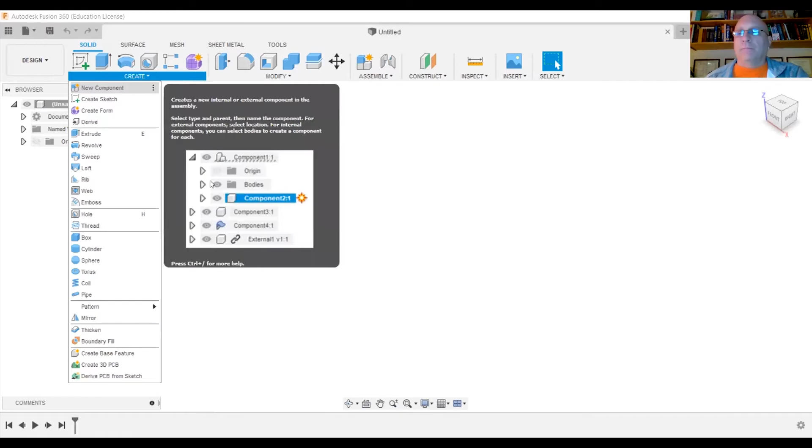I'm going to go up to my Create, and I'm going to select a new component. And we'll select OK. I'm going to come up, and I'm going to create a sketch. I'm going to use my front sketch there. I'm going to make a simple rectangle. I'm going to start at my origin, and I'm going to make my rectangle 6 by 2.

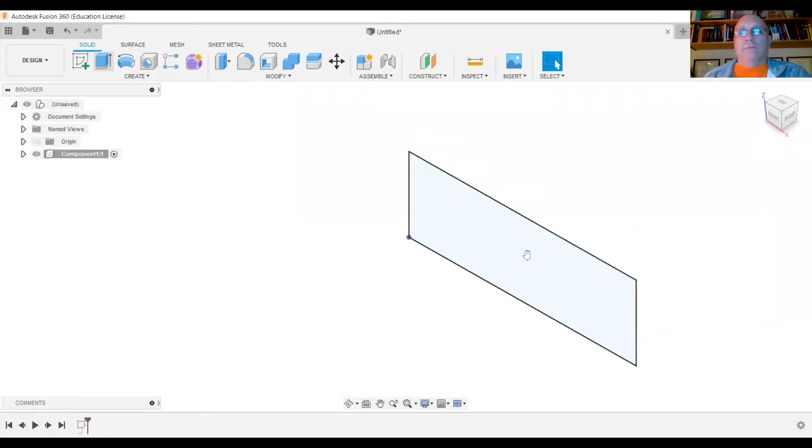I'm going to finish my sketch, and I'm going to extrude my rectangle back 1 inch. And we'll slide it over here so you can see a little bit. I'm going to zoom in. Now, we're going to actually put some holes in, but I don't need to make any more sketches. I'm going to do everything in 3D.

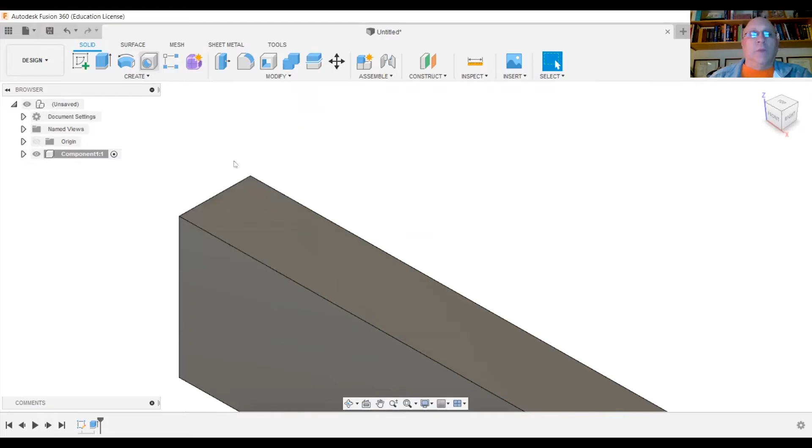So I'm going to go right up here, this little icon called hole. I'm going to select the face that I want to put my hole in. Next, I have to select the edges where I want my hole reference to. So I'm going to select my far edge. We'll make that 0.5. I'm not hitting enter. I'm just typing in the number. And I'll select my front edge, and I'll call that 0.5.

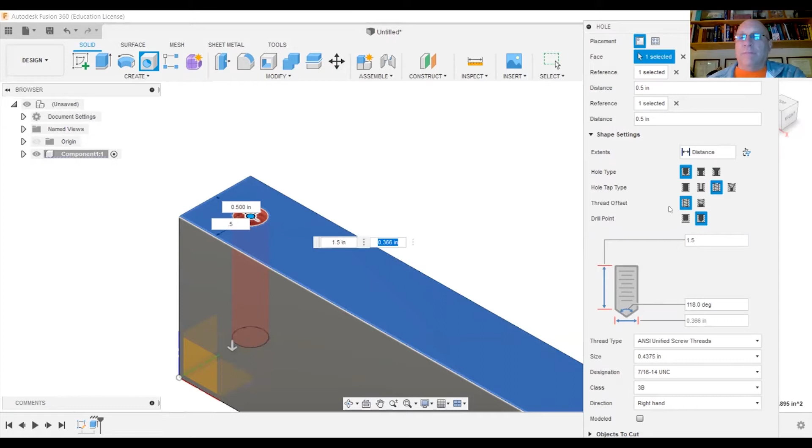Next, I'm going to come over here and look at my hole dialog box. So right now I have just a simple hole. This hole, I want to make threads in there. I want to tap it. So I'm going to select tapped. For the depth of this hole, we are going to make this not all the way through. So I'm going to make this about 1.5 deep. I'm going to close this up so you can kind of see this bottom window.

Now, the size of my hole, I want this to be a 1/2 inch. And its designation, it's going to be 12 dash or 1/2. My designation is going to be 1/2-12 UNS. I'm going to make it 1/2-13 UNC. My class, I'm going to make it a 2B. I'm going to select OK.

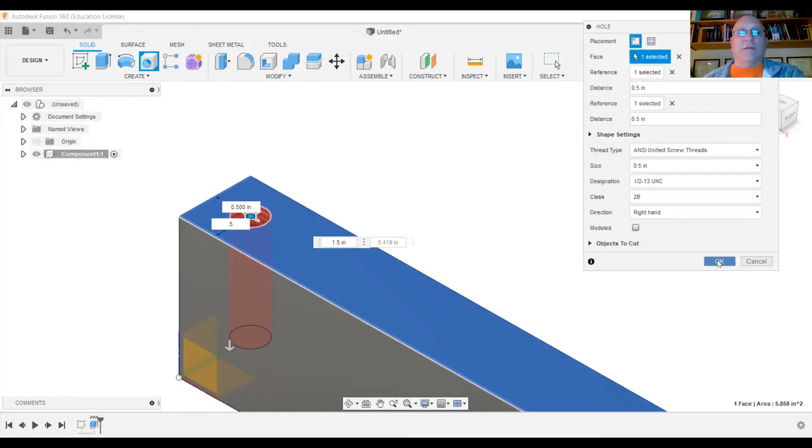Now, when I zoom in, you can kind of see that it looks like there's threads in here, but all that is just an image that's been pasted in there. What I want to do is I want the real threads. So I'm going to go back down on my history bar down here. I'm going to right click, edit the feature. This time, before I hit OK, I'm going to select modeled. And then I'll select OK.

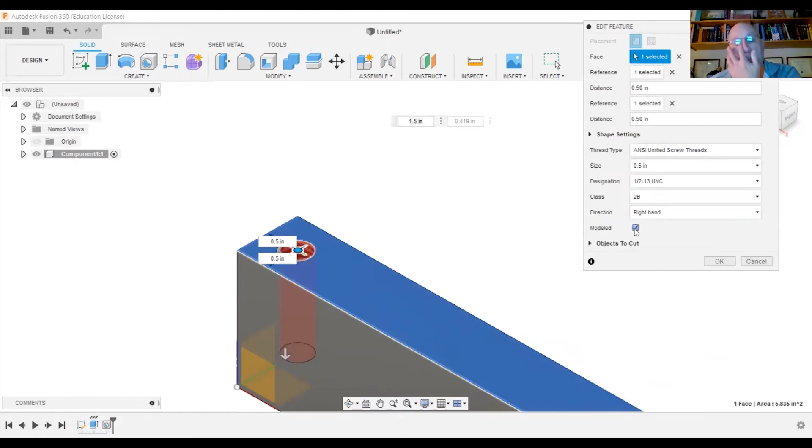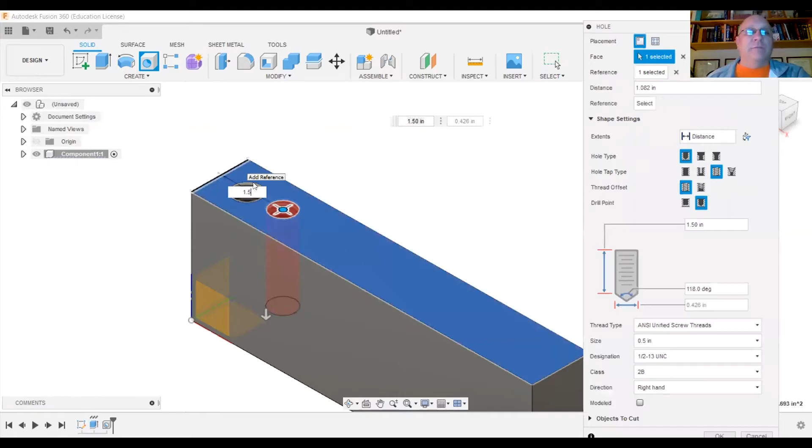Now, if I come over here, you're going to actually see that there's threads actually technically cut right inside of this piece. And that's what I want to see. I'm going to go back up. I don't have to make a sketch. I'm going to go back up to hole, select my top again. My reference edge, we'll make that 1.5. My front edge, I'll make it 0.5.

This time, I'm not going to put a straight hole in. I'm actually going to put a counterbore hole in. And I'm also going to leave it tapped. So now I need to set some dimensions on my counterbore and my hole. So my counterbore hole depth, I'm going to make it go all the way through. So we're going to call it 2 inches.

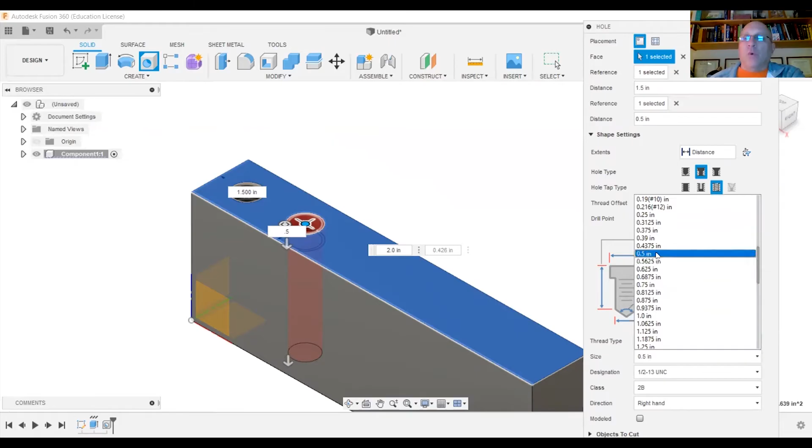For the size of my counterbore, we're going to make that 0.5. That looked pretty good. I should have left it. And how deep my counterbore is going to go, 0.25. That looks pretty good. I'll come down here to my size of my hole. Now I'm going to make this hole a little bit smaller. So I'm going to make it 0.25. And I'm going to leave these settings as they are. I'm also going to select modeled, shorten this up so I can see, and we'll hit OK.

And now you can kind of see if I rotate this around a little bit, you'll be able to see inside there. And you can see that I have threads cut down inside. I'm going to put another hole in. And again, we'll just select the top. I can select my 2 reference edges. So we'll say this is 2.5. And we'll go 0.5 again.

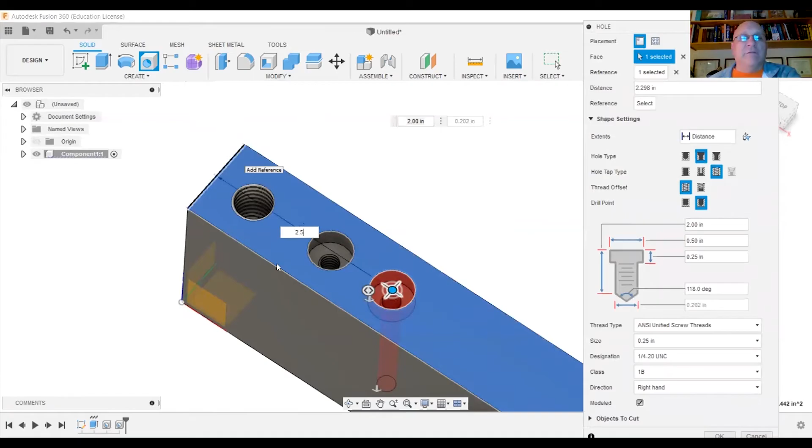So this time I'm just going to put a simple counterbore hole in. I'm not going to tap it. I'm not going to do anything. So we're going to untap it.

And let's see the depth of this. Yeah, we'll leave it at 2 inches. The size, we're going to make this a little bit bigger, so I'm going to say 0.675. For the depth, we're going to make that one a little bit bigger so you can kind of see the difference, 0.375. And for the size of my actual hole, we're going to make that 0.375 also. When I'm done, I'll hit OK.

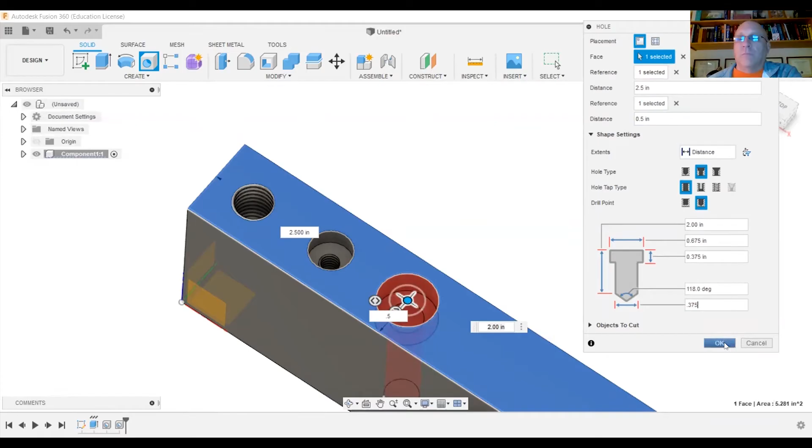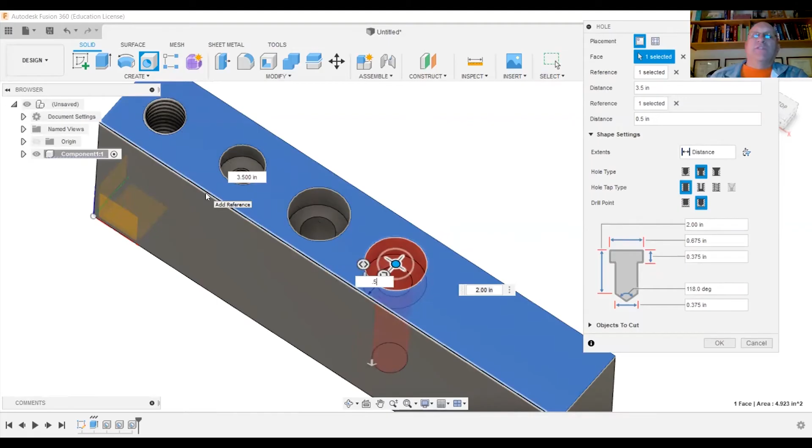And you can kind of see here's my counterbore. It's a little bit bigger than the previous counterbore. Put a couple more holes in. So I'm going to go back to hole, select my top, I select my reference edges. So we'll say 3.5. And the front one, we'll just do 0.5. This time I'm going to put a little different type of hole in. We're going to put a countersink hole in, and we'll tap this one.

So my countersink, I'm going to leave it go 2 inches. I'm going to have it go all the way through, just like the 2 previous ones. For the size of my countersink hole, we're going to make that a little bit larger. I want to make it 0.75. We're going to minimize this down a little bit. And for the threads, yeah, I like what I see right here. I like these thread counts. Maybe I'll change this one. Maybe instead of a 3B, I'll put it back to 2B. I'm going to leave it modeled so I can actually see the threads, and we'll select OK.

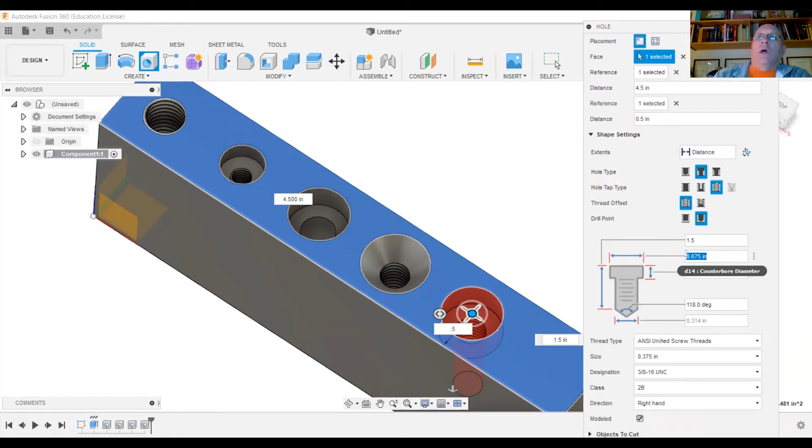Put 2 more holes in. So I'm going to come back. I'm going to put 1 more hole over here. We're going to go back to our counterbore hole. Need my reference edge. So we're going to say 4.5, and we'll do the front edge again, 0.5. So let's see, this counterbore, we're not going to make it go all the way through. We're going to make it go a little bit shorter, so I'm going to say 1.5. For the diameter of the counterbore, we'll make this like 0.5. For the thread sizes, we're going to make it a little bit smaller so you can see it. So we'll go back to 0.25. We'll leave it at 1/4-20.

The thing we're going to do with this one, though, is we're going to change the threads. We're going to put an offset on these threads. We're not going to have them go all the way down. So right here, I got a new dimension. So my hole goes 1.5. I'm going to make these threads go 0.75 down inside. So my threads aren't going to go all the way to the bottom of my hole. They're going to stop a little bit short. I'm going to make sure they're modeled, and we'll just minimize that down. And when I'm done, I'll select OK. And you'll see this once we do our section view.

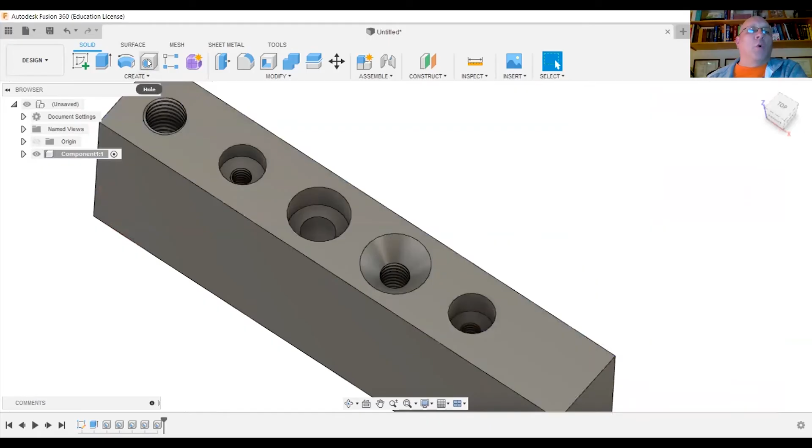I'm going to make 1 more hole, 1 last hole. So click on the top. I'm going to click that reference edge up there. Now you can click any 2 reference edges. I'm just clicking the same one. And I'm going to pick the front edge again. This one, I'm going to go to a countersink. And we'll slide this around so you can see it a little bit. Now my countersink, let's see, the depth, we'll leave it the same as the counterbore. We'll leave it at 1.5.

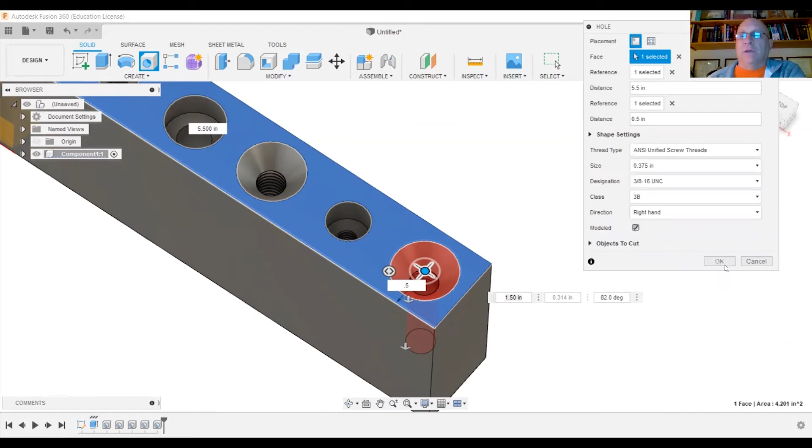For the countersink size, 0.75, I like that. I think we'll leave that. I'm going to do the same thing. I'm going to offset these threads. I'm going to offset them a little smaller, 0.5. And my hole size, we're going to come down here. We're going to make it a little bit bigger. We're going to go 0.375. And it's 3/8-16. I like that. And actually, this one we're going to change. We'll make this one 3B. I'm going to make sure that I have my model checked. I'm going to select OK. All right, so there are all my holes, my parts.

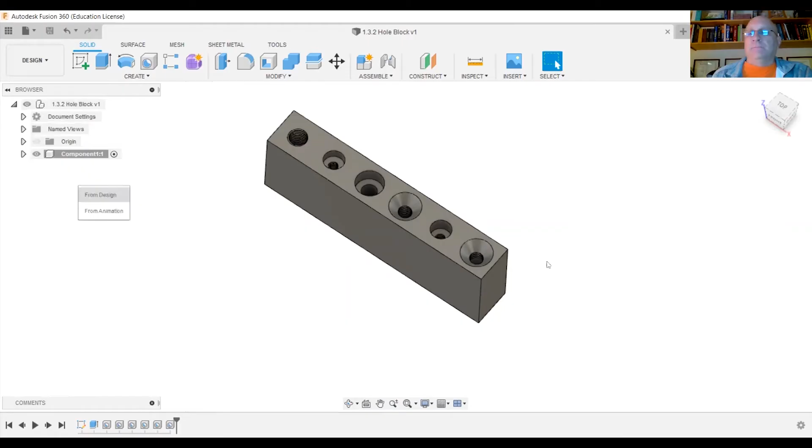That's real nice. So now we're actually going to put this block onto a drawing. So the first thing I need to do is save it and make sure I give it a good name, 1.3.2. So I'm going to go over to my design. I'm going to go down to drawing from a design. And I'm going to pick my custom title block. So it's my title block, and I'll hit OK. There's my title block. So I want to put my part in here.

Now I want to do a couple things first. Normally you would put the front view in, but for section view, we're not going to put the front view in. We're going to come over here and we are actually going to put the top view in because that's where all my holes are. Next thing is I need to make my scale a little bit bigger. Actually, I want to make it 1:1. So we'll make it 1:1 because I want it quite large. And I'm going to stick it right there. And I'm going to make sure I have my hidden edges on, and we'll hit OK.

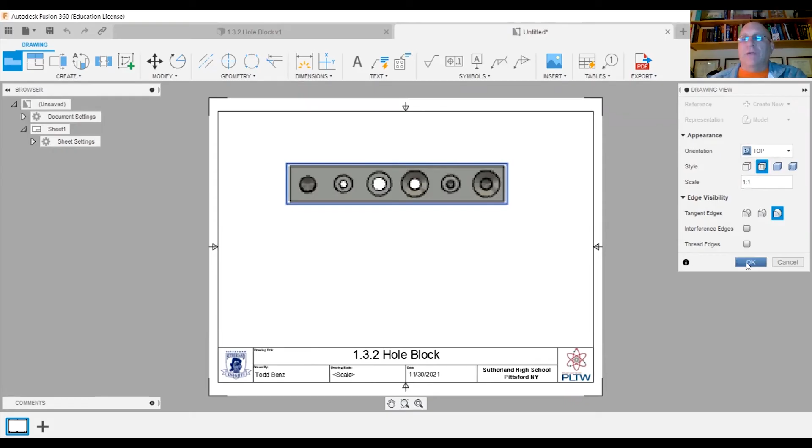So there's my block, but I need to see all the stuff that's going inside of this. I want to see what these actually look like. So what we're going to do is we're going to make what they call a section view. We're going to cut this block in half. So I'm going to come up there to this icon right here called section view. I'm going to click on it. So what do I want to make a section view of? Well, this is what I want to make my section view of. So I'm going to click on it once.

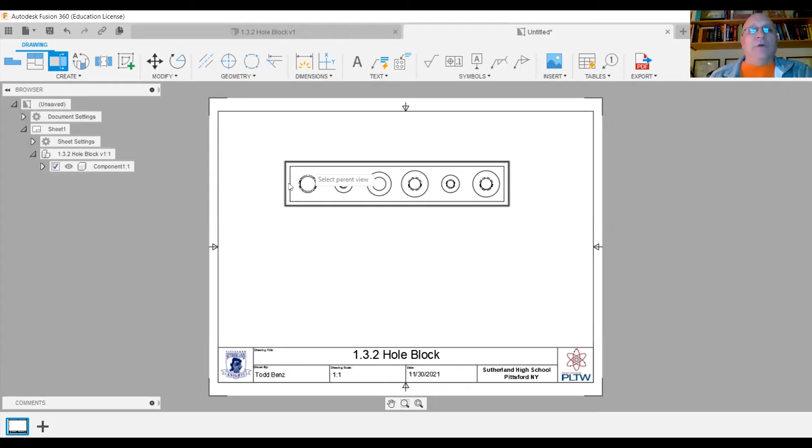Now I'm going to move my cursor down to this midpoint right here. I'm not going to click. I'm just going to slide it out, and I can kind of get those little dotted lines. So I'm going to bring this out to about here. I'm going to left click once. I'm going to bring it straight through. I'm going to left click again, and I'm going to move my mouse down here. And now I'm going to right click and hit continue. And I'm going to bring that other view right down in here.

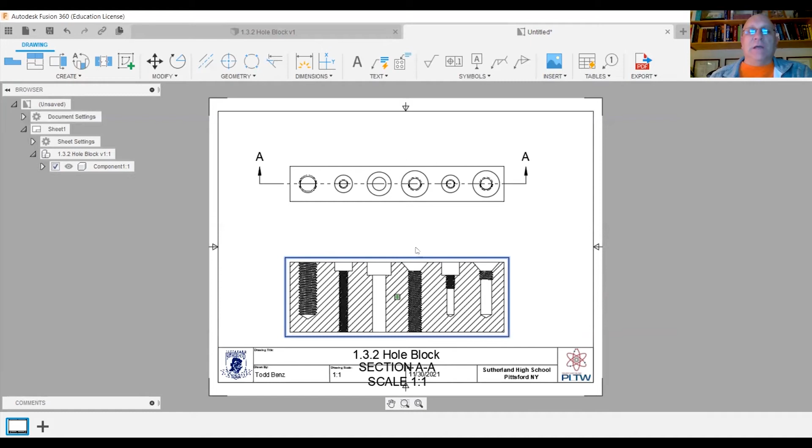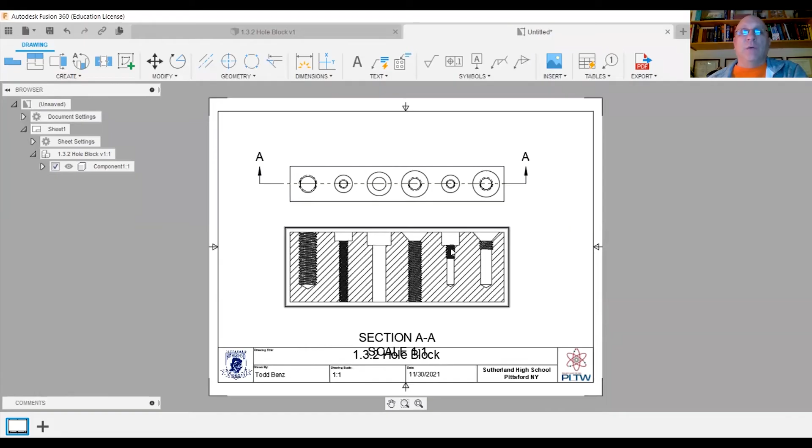And now you can see a section view. I'll slide it up a little bit right now. So now you can see a section view. You can see what's actually inside here. So what the cutting plane is pointing to, it's pointing to that I'm looking at this back part. I'm looking backwards at this part. So I'm looking at the back end of it. You can see my section lines. These are these lines that are at an angle that represents where the material is. And then you can see where my holes are. You can see that I'm cutting right through those holes.

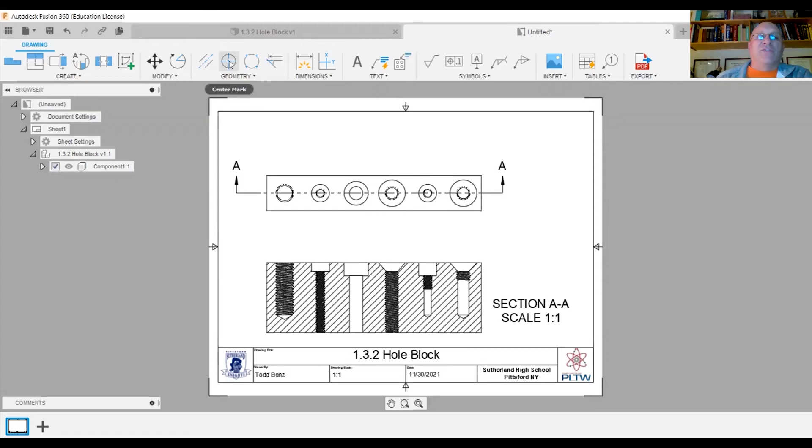Here's my little note. So I'm going to bring that up, and I'm actually going to slide everything over just a little bit because I know that I'm going to be needing more room. I'm going to slide this down a little bit. So now I need to go and start putting dimensions and annotations on. The first thing I want to do for annotating is I want to put a center mark on my holes. So I'm going to come up here to center mark, and I'm going to select the outside edge of all my holes. And this last one I know is going to be small. If I can grab it, there we go. It's in there. It's going to be small.

So I'm going to go to center line. I'm going to click on these edges right here for all my parts. So I can click on that one. I'll be able to click on this one, and I'll be able to click on that one. I can't really grab where I have my threads, because you won't be able to see the line itself, but these other ones I can see it. So I am going to put my center lines in there. When I'm done, I'm going to hit OK, and I can grab these center lines and I can pull them up and down a little bit so you can see them a little bit better. Just grab the little tip arrows, slide them up, tip arrows on this one, pull this one down a little bit, and pull that one up, just so the center lines, you can see them a little bit better.

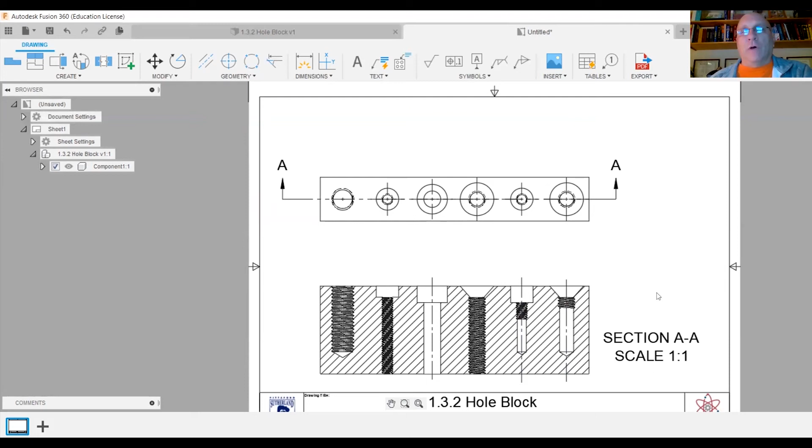Next thing is I need my overall height, width, and depth. Got to get those in there. So I'm going to go up to dimension tool. Here's my overall width, pop it in there. My overall height can be right here, and I'll put that right on there. I'm going to move this out of the way a little bit. And my overall depth is going to be right up here on this view. I'm going to put it right in there.

So now I have my overall height, width, and depth. I need to locate all my holes. So I'm going to locate them left and right. So I'm going to use my dimension tool. I'm going to come from this edge to the center. You always locate a hole to the center.

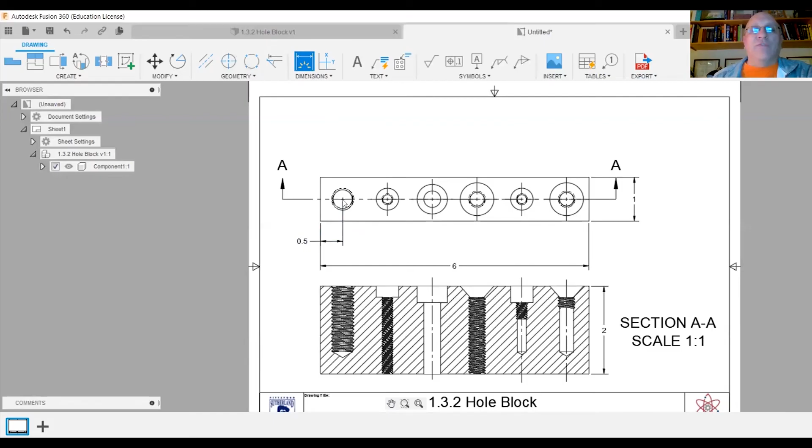All right. Now, before I go any farther, I'm actually going to click on this one. I'm going to move that dimension out here because I know it's going to be in my way. I'm going to go back up to my dimension tool. Now I'm going to go from center to center. Okay. And I'm going to line these up as best I can. It's jumping down there. I'm going to continue doing my dimensions.

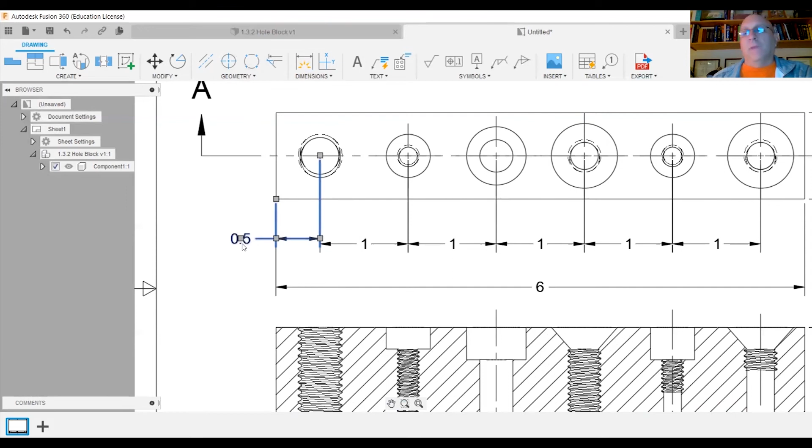Hit OK. Let's see. There we go. Slide that down a little bit. I want to get them all lined up. I don't have to put this last one in because I have my overall. So now I need to start putting in my notes for my holes. So that one, we're going to go up here where it's hole note.

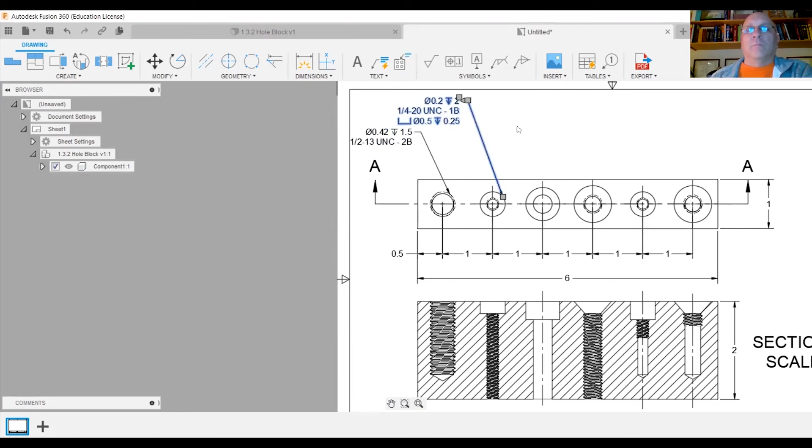What I'm going to do is I'm going to be able to click on the edge of my holes. I'm going to pull up away and just click again. And it's going to put my hole note in. I'm going to continue to put my hole notes in. I'm going to grab the outside of my hole. Okay, we'll move that around a little bit so it's not right on top of the other one. Move my arrow a little bit.

Go back to my hole note. I'll plop that one in. I'll be moving some of these around in a second. I'm just going to put them all in to begin with. And we'll slide over so we can see a little bit more. Hole note. And finally, my last hole note.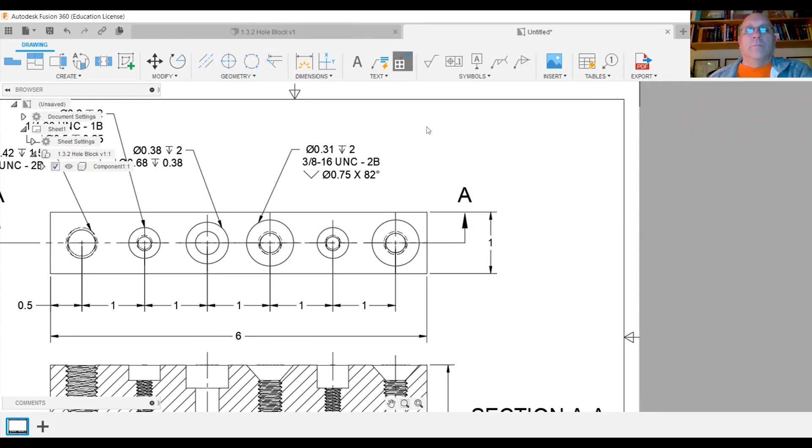Now I'll go in, I'll kind of start cleaning things up a little bit. So start moving these around. I'll push that one over here. I'll double click that. We can move that one around. I'll click this one. I can move that one up and around. I kind of want to line it up with that. And we'll move this one up and out of the way. I can actually move this over here.

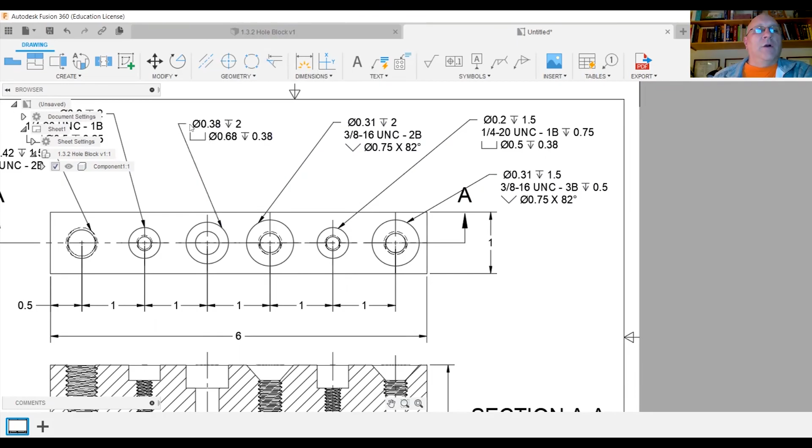Move my arrow. If I zoom in a little bit and click on it, you'll see the little arrow. I can slide it like this. So I have a little bit bigger tail. These two I will actually move a little bit more. Maybe I'll move them down just a little bit. And same with this one. I'll move this one down just a hair. Kind of line up with these.

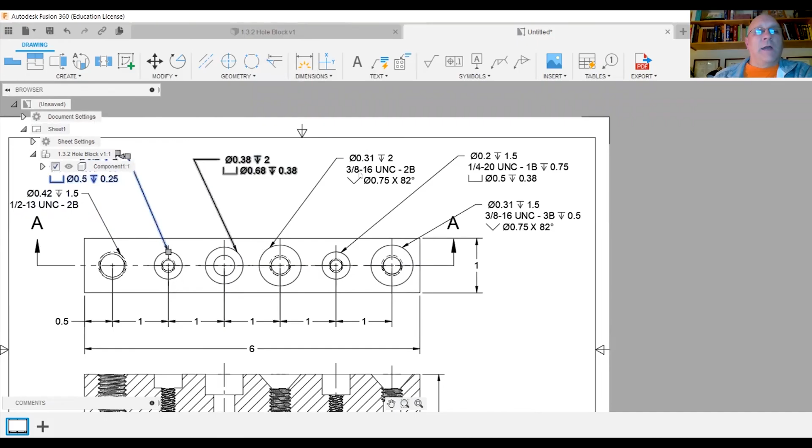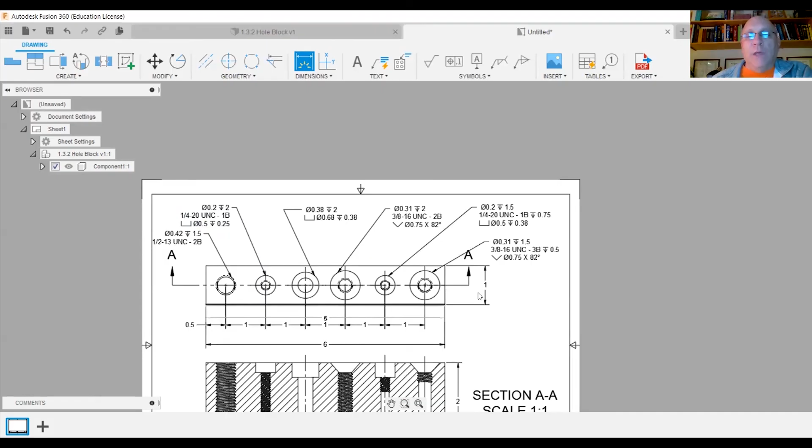So I have all my hole notes. I have them located left and right. The only thing I have left is I have to locate these holes, what I call up and down. So I have one more dimension to put in. So what I'm going to do is I'm going to locate these holes, and I know they're all 0.5 from this front edge. So from this front edge to that hole, I'm going to put this dimension in, and I'll move things around in a second. We'll move this one out, and that's 0.5. I'm going to move this one down.

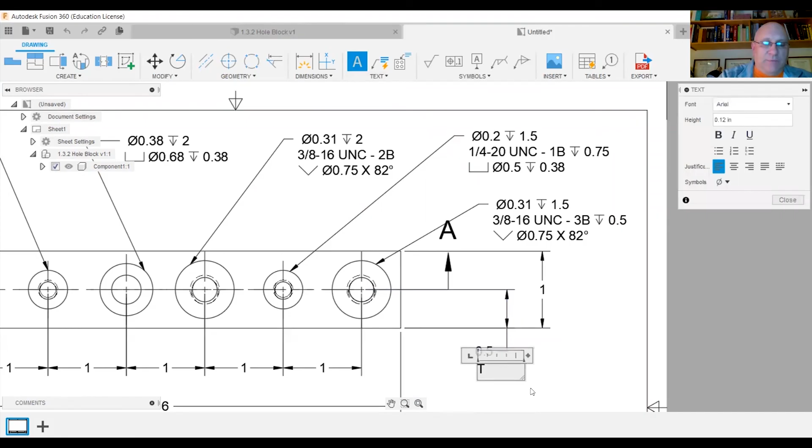Now, all these holes are 0.5. So what I can do is I can put a little note in. So I'm going to come down here and I'm going to put this little note, and I'm going to type in capital TYP period. And what that means is typical. It means if I see this and they all look like they're going to be 0.5, I automatically assume that they're 0.5. So I have all my dimensions in, my overalls, and all the holes located up and down, and this would be a completed drawing.

I would probably just want to make sure that I come back and clean things up again, make sure everything's looking pretty good. You know, I don't want anything on the borders or anywhere else like that. So I'm going to pull everything back and just kind of clean it up. So this is everything that I need to make a section view.

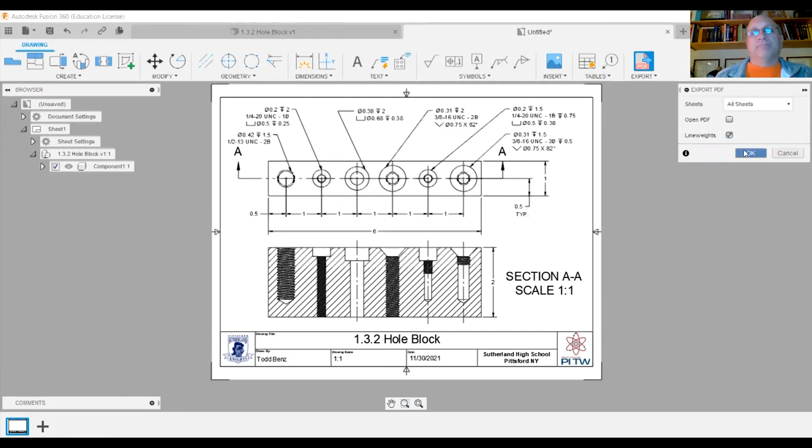When I'm all done and want to submit it, go up to export. Export as a PDF. We'll hit OK. And I always give it a name, 1.3.2 block drawing, and we'll hit save. And lastly, we will save this drawing and we'll call it the same thing.